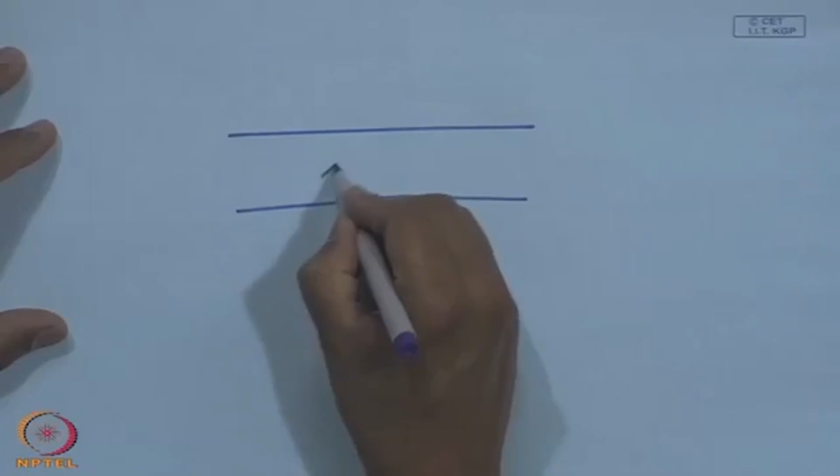Today we are going to discuss about detection of cracks in shafts. Predominantly, when cracks occur, materials and structures fail, but we need to monitor the cracks and the system so that they can be detected at an early stage, because cracks can occur in any system, be it a shaft or a plate, and for many reasons. Cracks are sometimes visible if they are on the surface, and if they are invisible, they are inside the body.

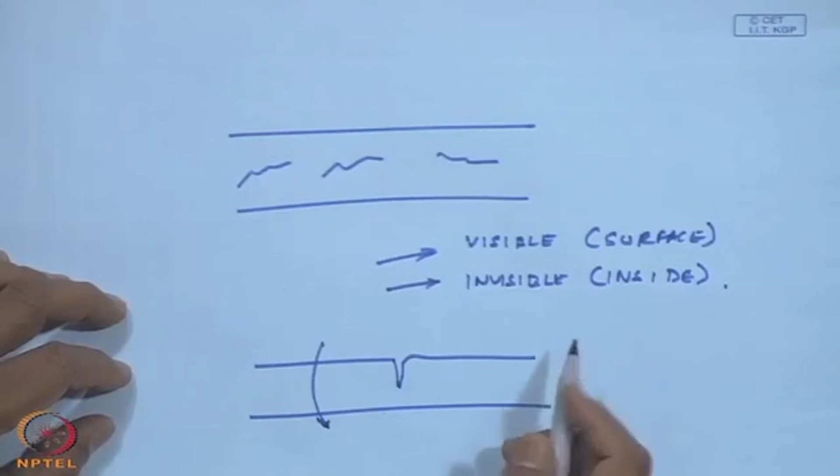Once cracks occur in a system, what happens? This is a shaft which is rotating. Obviously its strength is going to weaken and decrease, and eventually if this crack goes undetected, the component is going to fail, leading to catastrophic consequences. Imagine a case of a railway axle, where wheels go on these axles—if cracks occur and the system fails, there will be derailment, accidents, etc. So cracks have to be detected at an early stage.

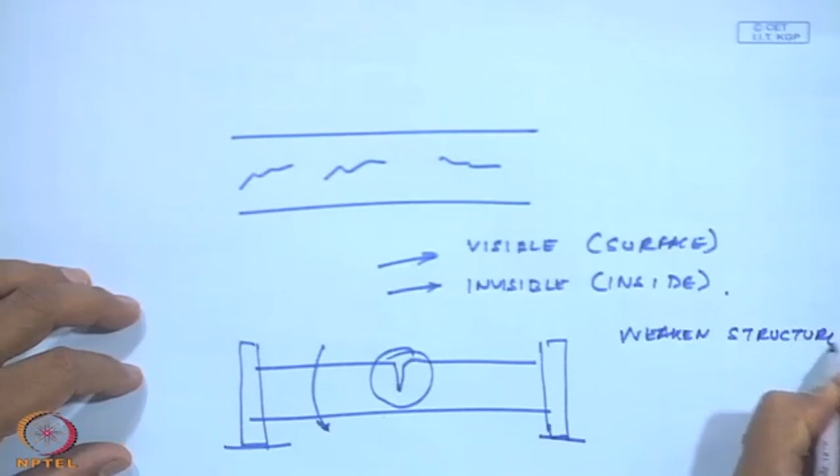If you notice here, this crack, a very generic crack, is going to weaken the structure. Its strength is going to decrease.

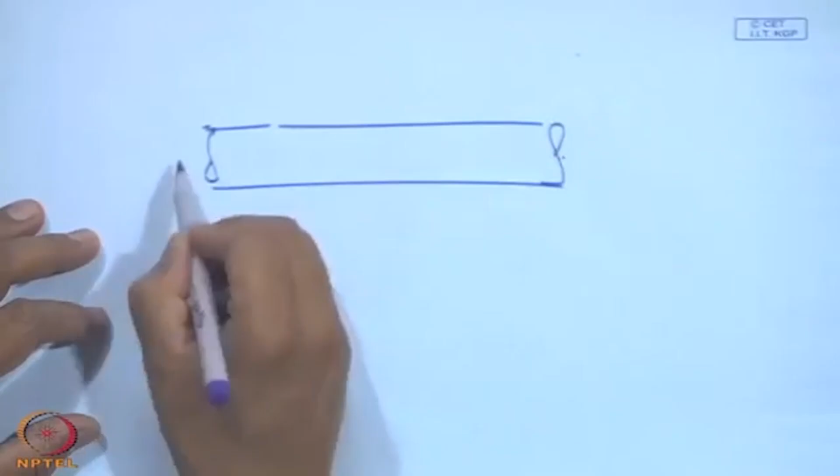Once the shafts are rotating, the systems rotating, this becomes a very complicated issue. Things are rotating, and if there are weights being carried on the shaft, because they are rotating, these cracks are subjected to varying loads. There will be fatigue loads on the crack, and a material subjected to fatigue loads is going to fail much more quickly compared to a static load.

Imagine this as a shaft, and it is rotating, and there is a small crack. Every time it rotates, this crack is going to open and close, and eventually because of fatigue loading it is going to fail much more quickly. This is something we should not let happen.

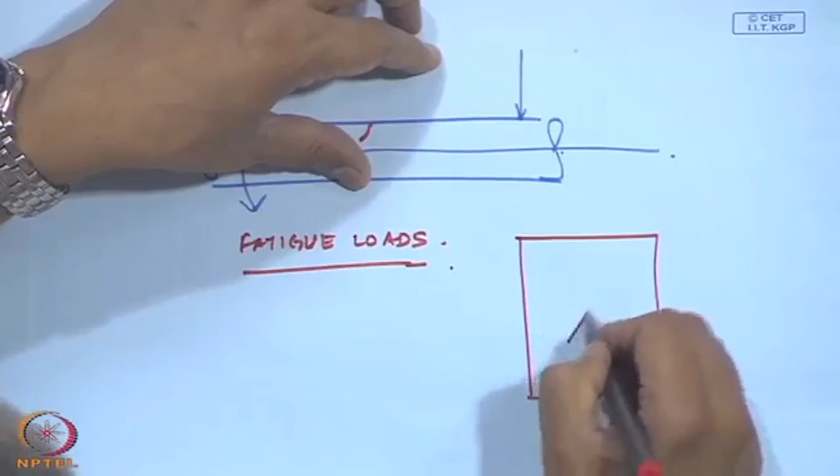This is one type of crack, and in this class we are going to focus on such cracks on shafts which are visible from the outside, and how we can detect them. But cracks do occur in structures, inside as well as outside. If it is inside the structure, it is very difficult to visually see it, so people do what is known as ultrasonic inspection, which we will study later on.

Ultrasonic inspection, or what is known as NDT type of tests.

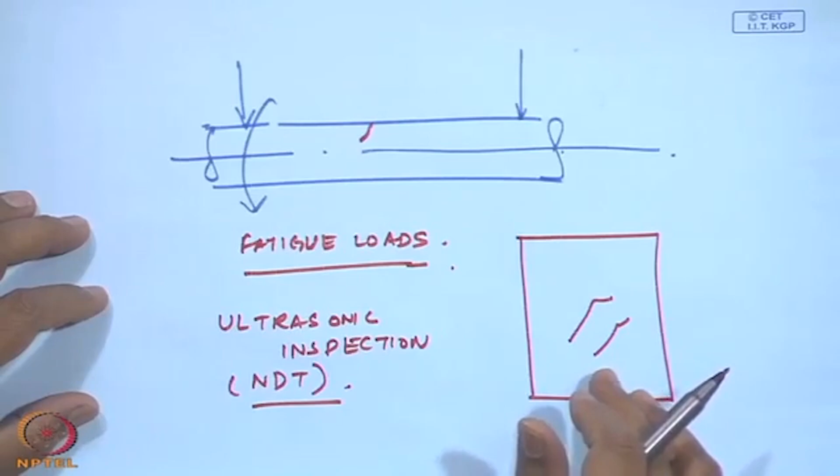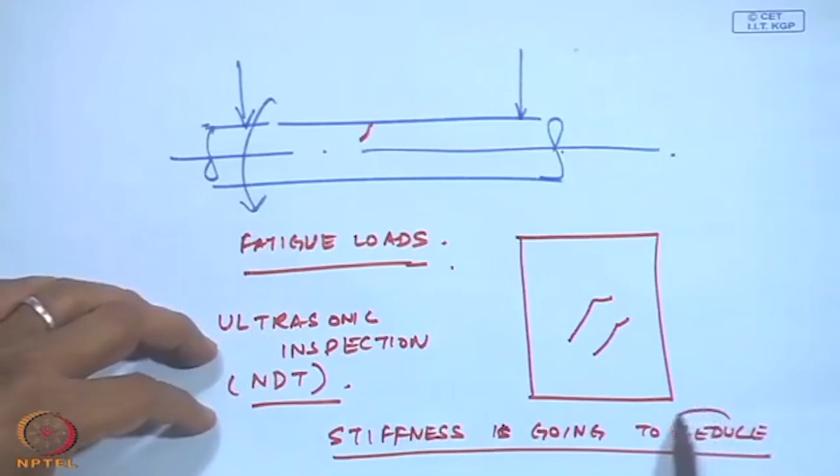One thing you will notice here: if a crack has occurred, the local area around the shaft is going to be not as stiff. Stiffness is going to reduce. Actually, reduce is a pretty strong word—I would say stiffness is going to change if a crack has occurred in a system.

You will recall the natural frequency of any system is root over k by m. So if there is a change in stiffness, there is obviously a change in natural frequency. With this, you will see there are methods of doing the eigenvalue analysis of a system, where we can find out the change in natural frequency and conclude that maybe a crack has occurred.

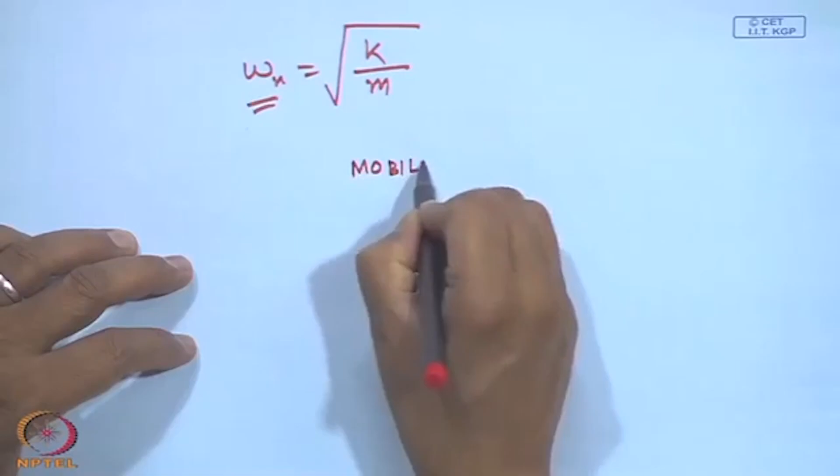The system's transfer function is also going to change. If you recall, the impedance of a system is defined by force by velocity. And then we have impedance, which is the inverse of mobility.

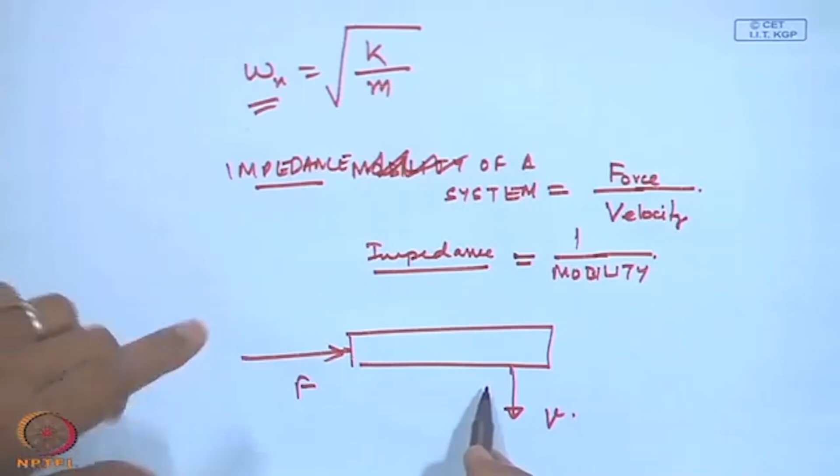By giving an excitation to the system, some force, and measuring some velocity, I can find out the system's impedance, which is force by velocity, the inverse of mobility. So by giving an excitation to a system and measuring its response, if a crack has occurred, this mobility is going to change. That is also another way of detecting whether a system has undergone a crack or not.

Before we go into the discussions on methods to find cracks, let me tell you the two types of cracks which can occur in a shaft. In this class, as I was telling you, we are going to focus only on shafts which have cracks; cracks occurring inside structures will be dealt with when we discuss ultrasonics. A load on a shaft could be because of bending loads. Shafts are supported on bearings—these are bearings.

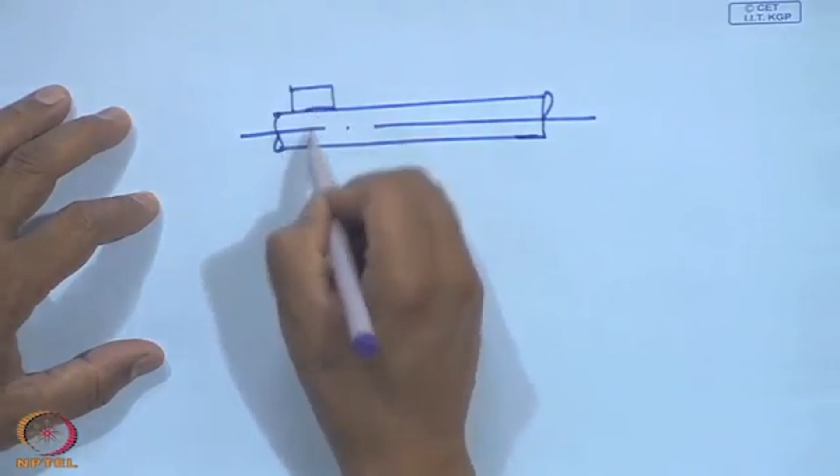There could be a crack, and there could be some bending load because of a weight. Then we are going to have this kind of crack, which is usually transverse, almost in this line. These are transverse cracks. And if I exaggerate it in the drawing...

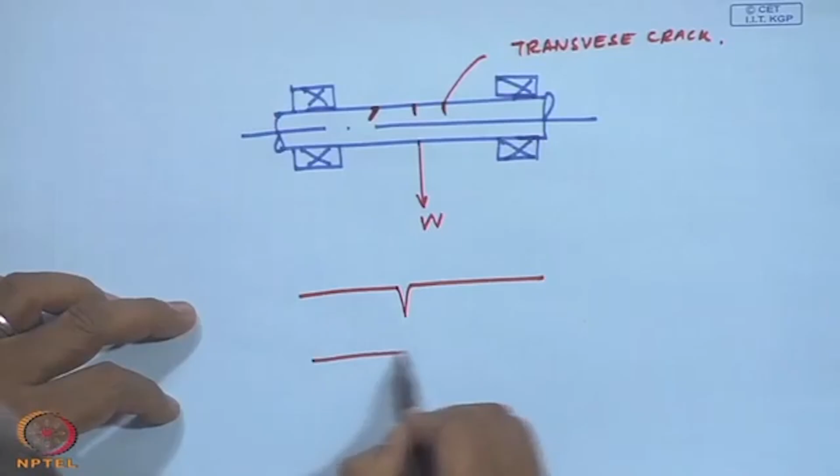So each time the shaft is rotating, once it comes to the bottom, because of the loads, the crack is going to open. Suppose there is a strong load here. It is going to open and close. Once it goes to the top, this crack is going to close, and again it comes down. It will open once it comes down.

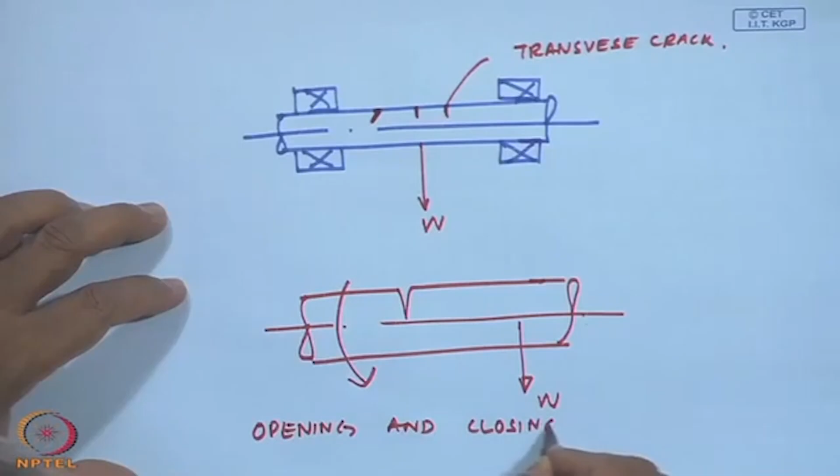It goes up, it will close. So this opening and closing of cracks occurs in a rotating shaft, and this is known as crack breathing.

Now, to our naked eyes, at times this will not be visible at all. Another parameter by which the cracks are defined is actually, if d is the diameter of the shaft and the crack depth is a, it is a non-dimensionalized parameter, a by d, crack depth to diameter.

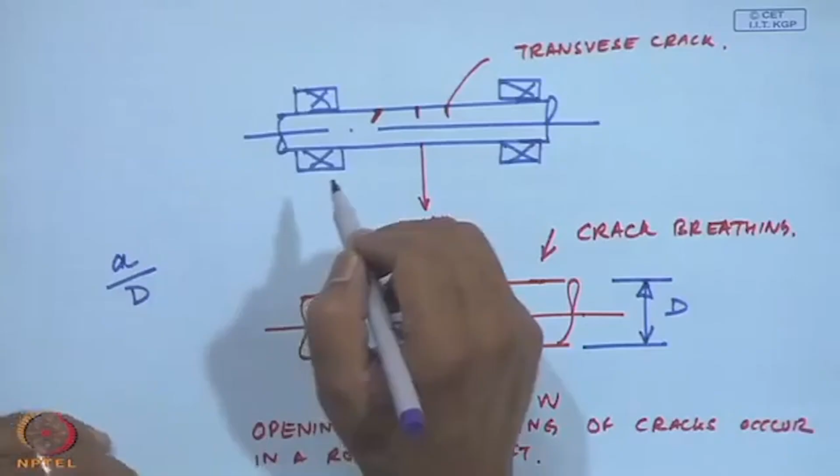Usually, of course, if a by d is 0.5, the crack is almost till the diameter. No system would go till even 0.5, because the structure would have become so weak it would have failed. Usually 0.1, about 10% of d, is the limit. Beyond that, we cannot have any structure sustain loads beyond a crack depth of 10% of the shaft diameter.

So we have to keep track of this parameter by which the crack is defined, and usually this is negligible, like a hairline. If you are talking about a crack on a shaft of about 12 mm diameter, even this dimension could be about 0.5 mm, a very thin hairline crack.

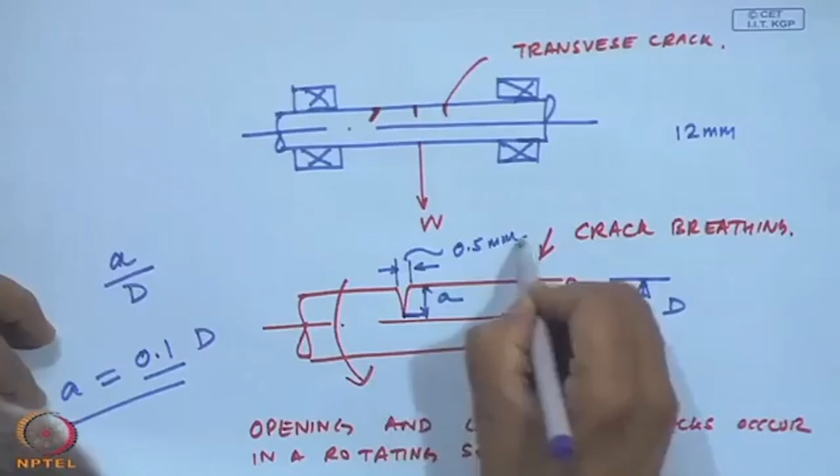In our laboratory, I will show you. We have done experiments wherein we use a hacksaw to cut a slot and make a crack also, and that's a massive crack, having a hacksaw cutting a slot on a shaft. But usually these cracks are hairline cracks.

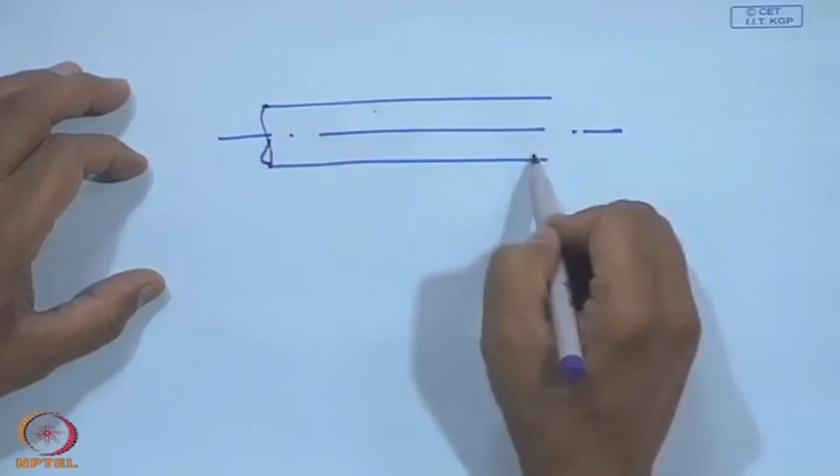This is a type of crack known as the transverse crack, because of the flexural loading on the shaft. Another important thing happens: as you know, shafts usually carry torsional loads. They transmit power, so they carry a lot of torque. And usually, because of the torque, the maximum shear stress occurs along the 45-degree lines.

If you are transmitting torque, usually the cracks are at this 45-degree axis, and these are the slant cracks. If you see cracks oriented on a shaft along these lines, you can know these cracks are because of the torsional loading on the shaft and not because of the flexural loading.

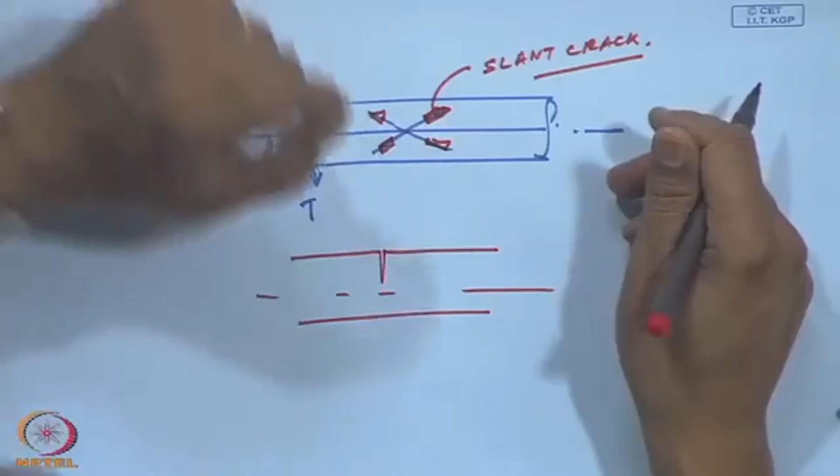Flexural loading, as I just told you, will be transverse in nature. So essentially in shafts, either a transverse crack occurs, a slant crack occurs, or a combination of both occurs because of the type of loading on the shaft, which is usually flexural loading because of bending forces, or torsional loading because of the torsional moment the shaft carries. So what are the symptoms or signs by which we can detect whether a crack has occurred through vibration monitoring?

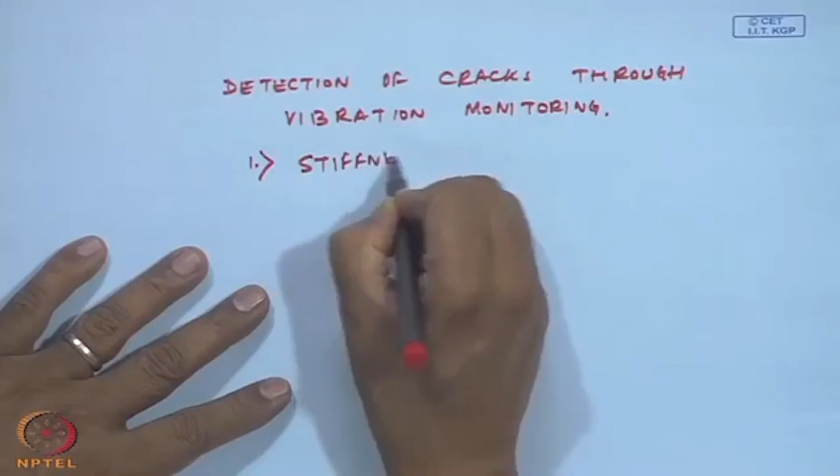Number one is the stiffness will change, so we can monitor the eigenvalues or the natural frequency. Number two, the mobility, inverse of the impedance, will change, so we have to do this through impedance measurements.

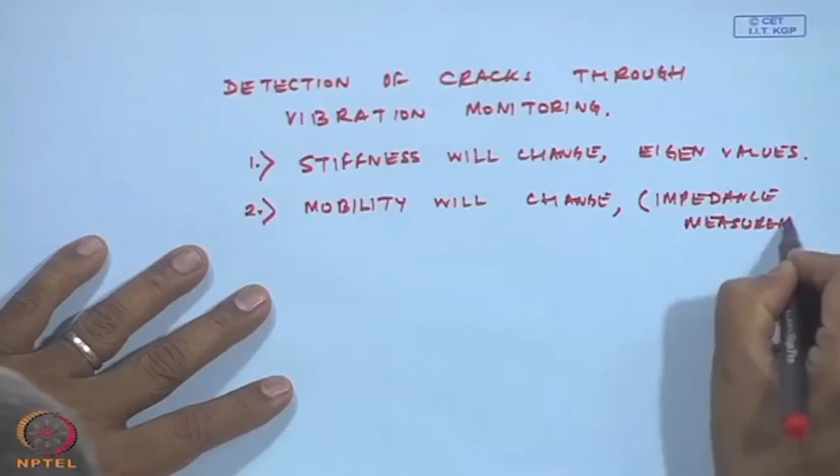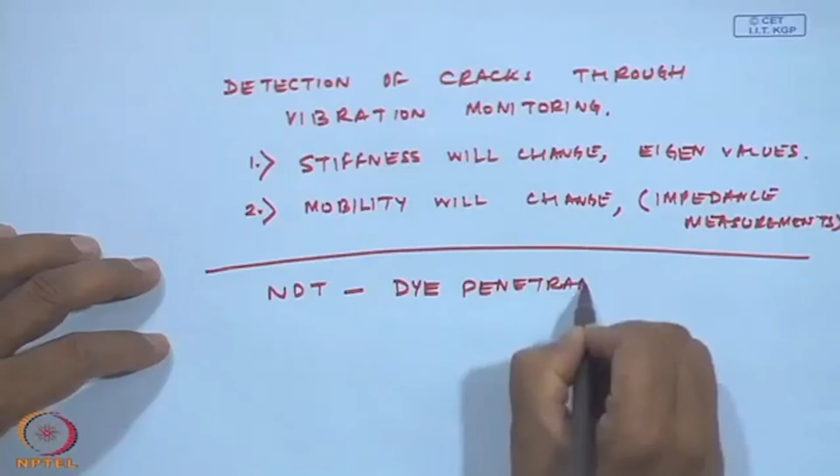Of course, once we are discussing vibration monitoring, there are techniques beyond vibration monitoring by which cracks are detected, and these are usually for stationary cracks on structures. One is through the NDT techniques of dye penetrant test, particularly to find out hairline cracks on castings.

Particularly, I will just give an example. So, for example, we cast an engine cylinder block. This is some view section of a cylinder block.

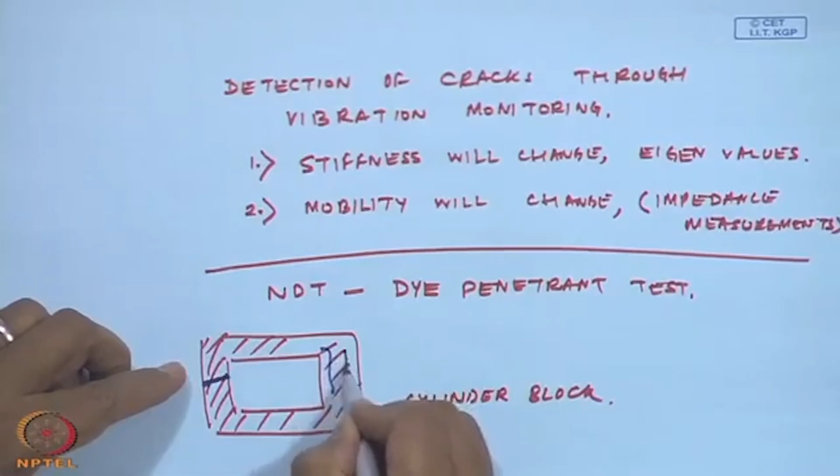A crack has occurred, a very thin hairline crack. Now, if you see a cylinder block, there are many things which happen. There are a lot of water passages which are made in the casting itself, so that the cooling water goes all around the cylinder block.

Now, they are under pressure. So, if there is a crack, what is going to happen? This water is going to ooze out. So, how do you detect such kind of cracks? That is why they do what is known as a dye penetrant test.

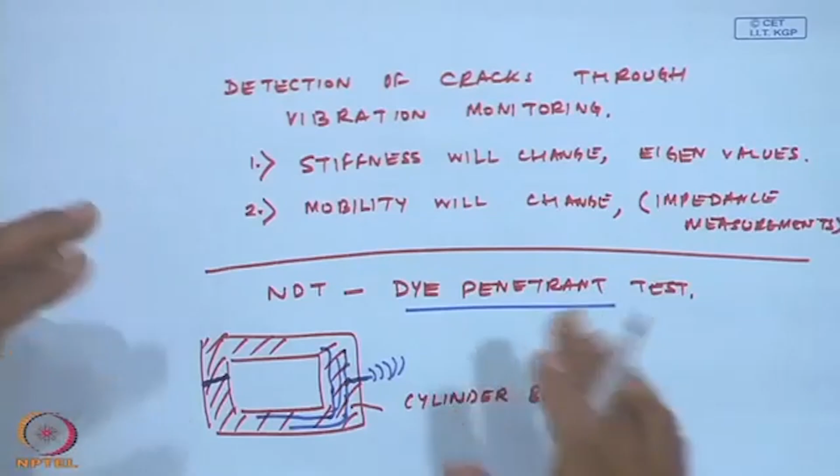After the castings are done, they smear it with a dye and then rub it off. If the crack is there, after you have smeared the surface with the dye, this dye will make a mark, ooze out, and clearly show that a crack has occurred just by looking at the dye. This dye could be not visible to the naked eye; under a fluorescent lamp the dye will glow, and then you can clearly see that a crack has occurred.

That is one way, which we will discuss later on in the ultrasonic and NDT section. And another crack detection technique, which they do for shafts which are rotating, particularly imagine in...

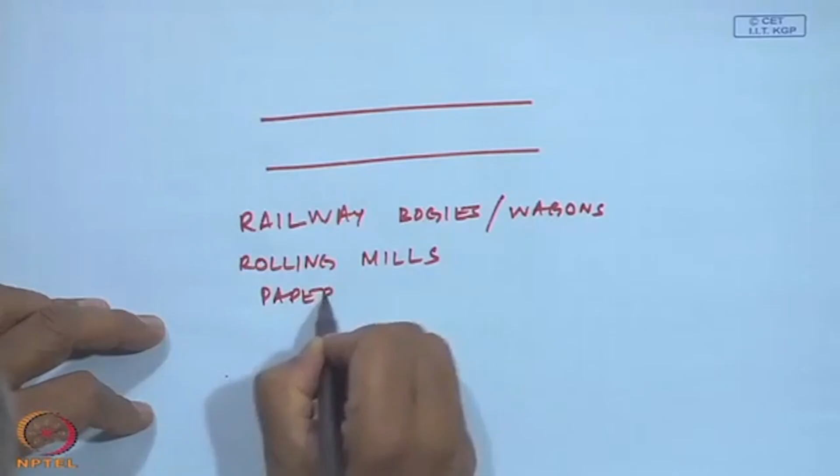railway bogies or wagons, rolling mills, paper mills, cement plants.

Here we have an axle of the train which is rotating. If the crack is inside, it will have the consequence that the structure is going to weaken, it will fail.

Rolling mills, a lot of rolls are there which run continuously. If a roll breaks, the steel plant, the cold rolling mill or the hot rolling mill, cannot produce.

Paper mills, there are about 100 to 200 rolling rolls. If the rolls crack, the paper mill is going to get shut down.

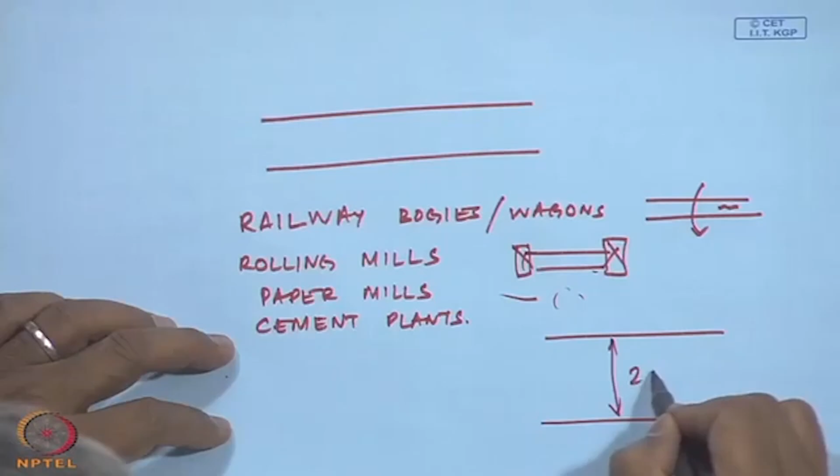Cement mill, the rotary kiln, a big shell about 2-3 meters in diameter, which rotates. If there is a crack, eventually the system is going to weaken and fail.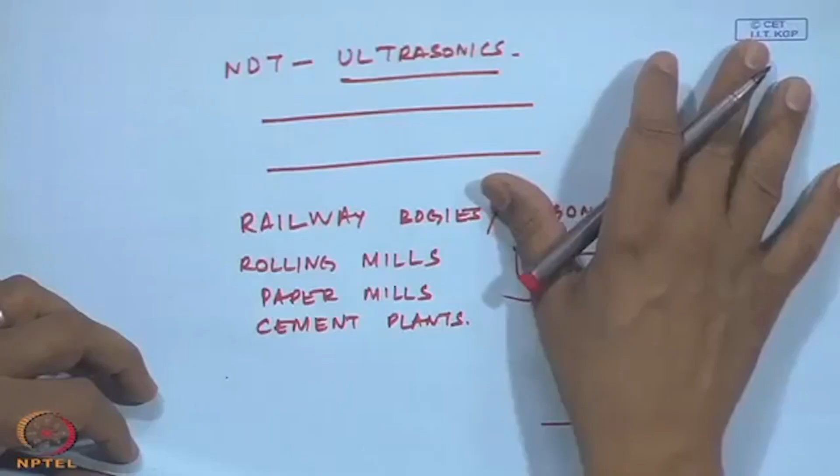So, these are actually tested by an NDT technique of ultrasonics. We will discuss about the dye penetrant and the ultrasonics in a later class, but in this class I wanted to focus on the dynamics of cracks in a shaft and how we monitor it.

So, we know that we can measure the mechanical impedance of such a system, we can measure the natural frequencies of a system, because if cracks occur, the stiffness is going to change, and so the natural frequency is going to change. Let us see how we can do that.

Shaft is totally cracked, and to simulate cracks, what you do is tighten these 4 bolts, loosen maybe the top 2 or any 2 or any one, so that at one end of the crack, maybe if I draw it here...

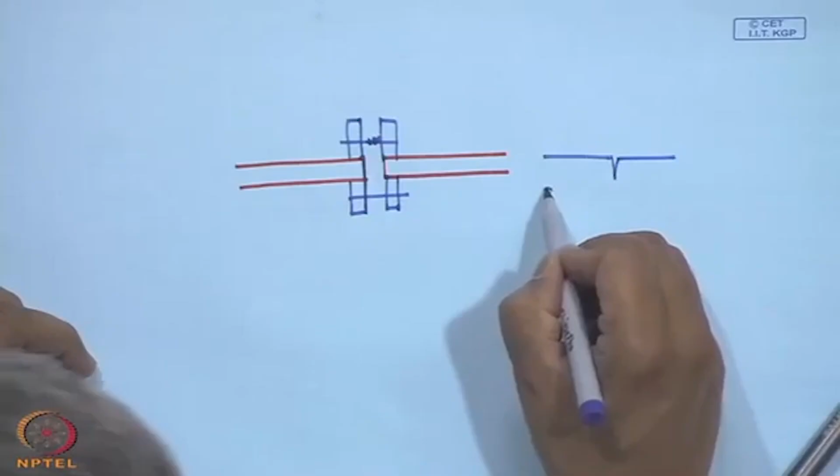If you see here, we have put 2 flanges. They are actually 2 crack shafts already, and then if you bring them together and put bolts, we join them, and then if you loosen this and tighten this, cracks maybe, this shaft maybe could be like this. So, to simulate a crack, we do this in the laboratory.

It's a heavy weight which is rotating along the sides of these cracks, so that this is responsible for giving that load, bending load which is coming down, and which will be responsible for opening and closing of the crack and creating this breathing mode.

So, we have got the vibration measurements from this system, and I will show it to you later on. Then we will have another setup which we do to find out the mechanical impedance. Like I told you, the techniques for detecting shaft cracks are mechanical impedance and then the eigenvalue analysis.

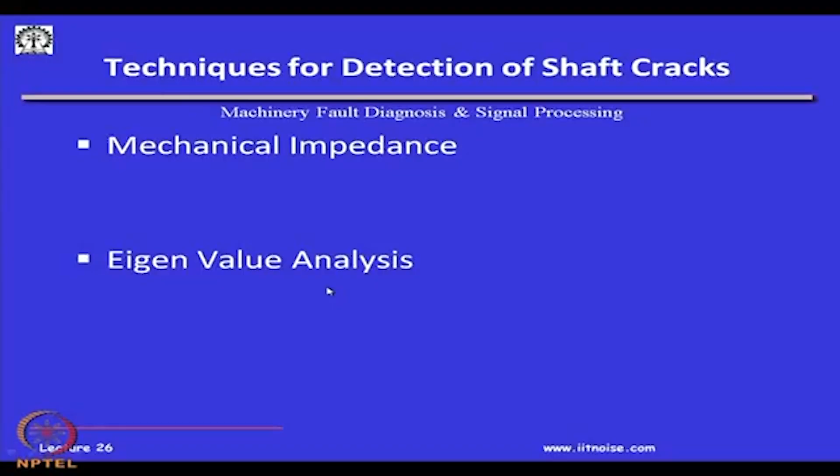To do that, we have this system where the shaft has a heavy disc, and we introduced a crack very close to the disc. This disc is responsible for opening and closing the shaft, and we try to measure the impedance of the system at one of the bearing locations.

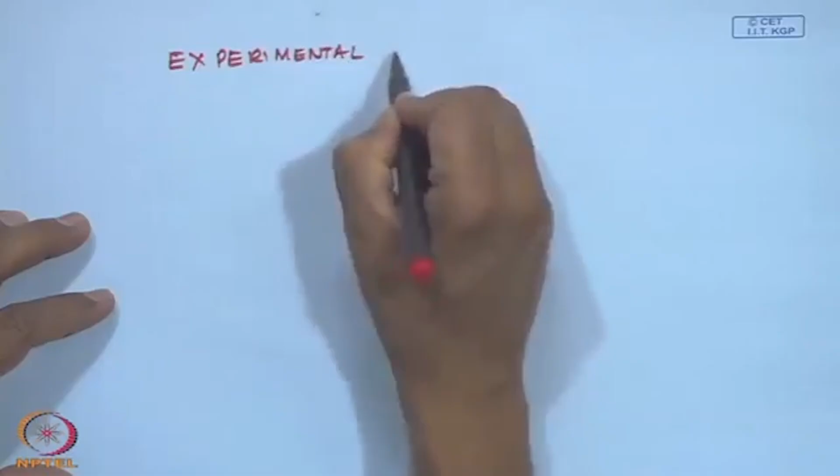Compressor, turbine, etc. So what we have to do is go through modal testing, through experimental modal analysis. Well, what is experimental modal analysis? Basically, we find out the transfer function of a system: the response to the excitation.

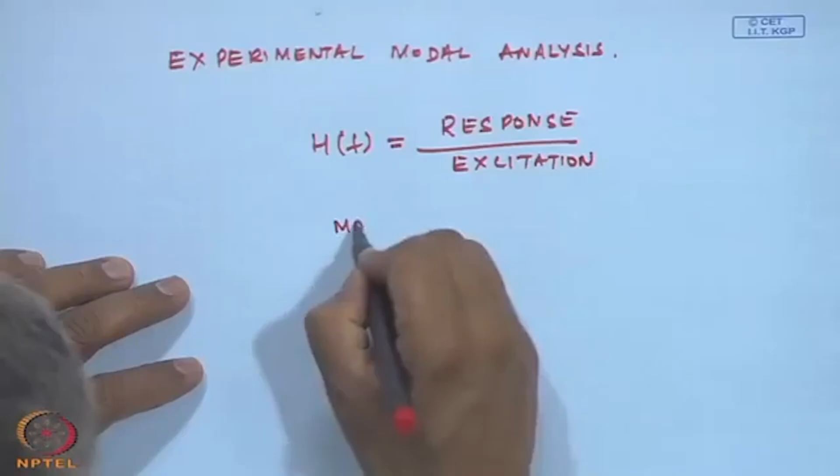In our case, mobility is nothing but velocity by force, and impedance is force by velocity. So for an unknown system where we have to do crack monitoring, all we have to do is give a certain known force at the frequency of operation. Suppose a gas turbine rotates predominantly at maybe 24,000 RPM to maybe 30,000 RPM.

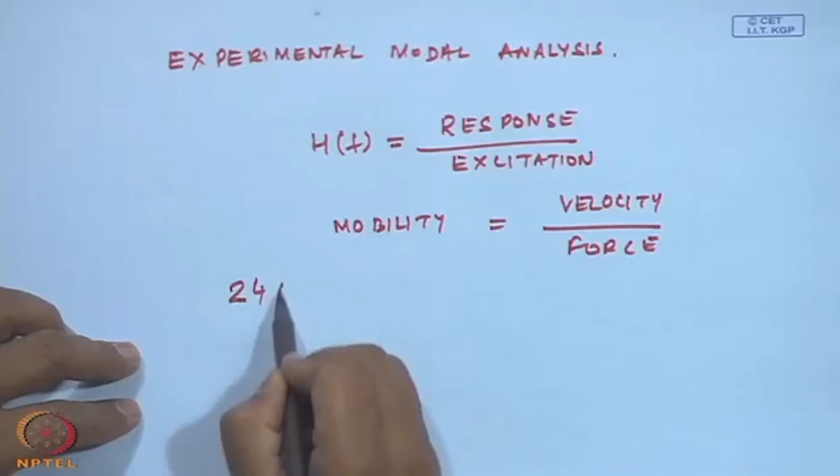This will correspond to 24,000 by 60, about 400 to 500 hertz. So from a range of 400 to 500 hertz, or a few of its multiples, you excite this system through a force.

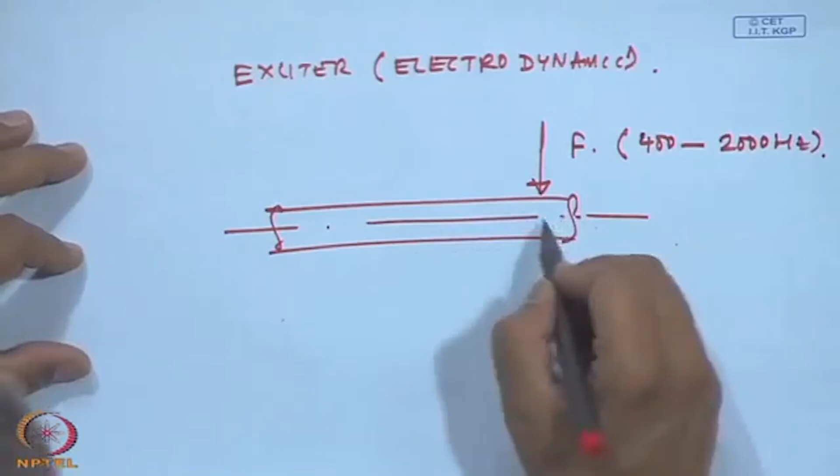How do you excite the system? Through an exciter. Usually, because it is a large gas turbine, we can use heavy electrodynamic exciters. I give a known force F from the frequency maybe 400 to 2000 hertz, and at the same time at the bearing locations, since turbines are supported with many bearings, we measure the response.

At any of the bearing locations, you can measure the force, and then with the suitable transducer you can mount an accelerometer, etc., measure the velocity, measure the force, and plot a mobility curve V by F as a function of frequency.

Now all you have to do is continuously keep on monitoring V and F. By continuously, I mean you need not give the force excitation every time, but momentarily, every day once, you measure V by F.

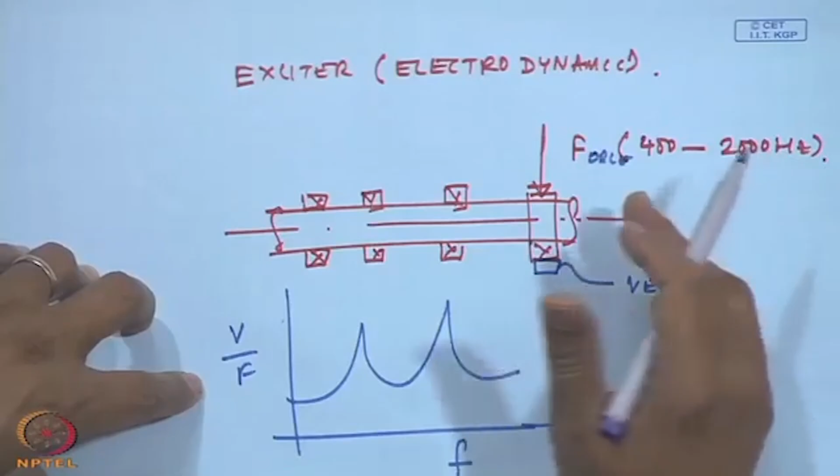Suddenly you will see this V by F, if we do the ratio. So this is my original, which I call m naught. And then you will have m n, which is V n by F n.

So you will plot m n by m naught as a function of frequency, and you will see that with a crack occurring, suddenly it should shoot up.

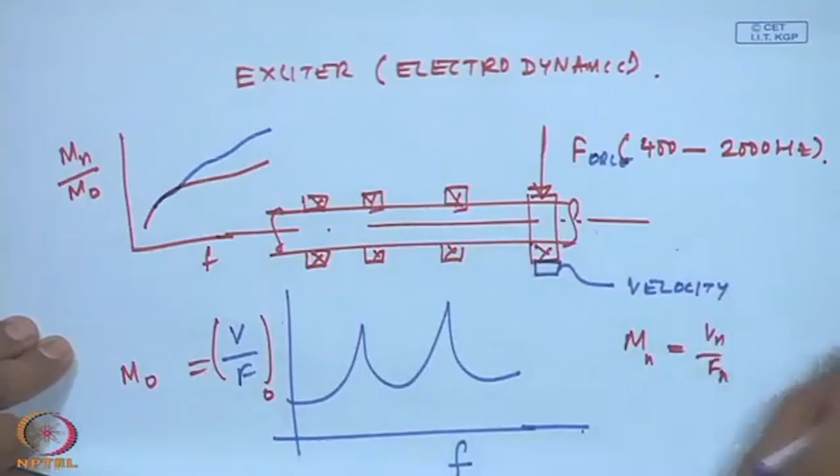Going back to the slide, I am plotting m n to m naught as a function of crack depth, but at a particular frequency I can monitor them. These frequencies are the operating speeds, and I will see that with a particular crack depth it is increasing. If the crack depth has increased, this value is going to increase.

So at a particular frequency I can decide on the frequencies. Frequencies usually will be the operating frequencies, and this is out of our research which we did about 10 years ago.

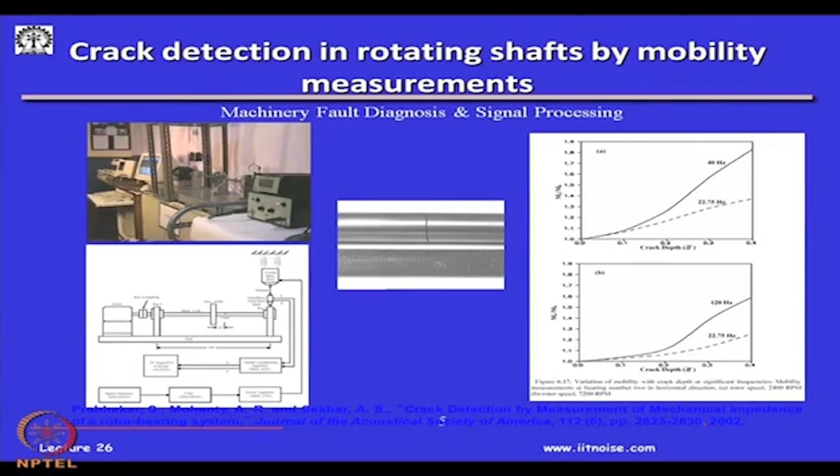Just measuring the mechanical mobility of a system to monitor cracks occurring in a system. You can get a reference to this paper at my website. This came out in JASA in year 2002.

Volume 112, number 6, pages 2825 to 2830. The details about this technique are given in that paper of ours, wherein just by monitoring the mobility of a system, we can tell whether a crack has occurred in a system or not.

Now, in a nutshell, to monitor the occurrence of cracks in large systems, you have to measure the mobility of such a system periodically, and if the mobility value increases, you will get an indication that the crack has developed or is growing.

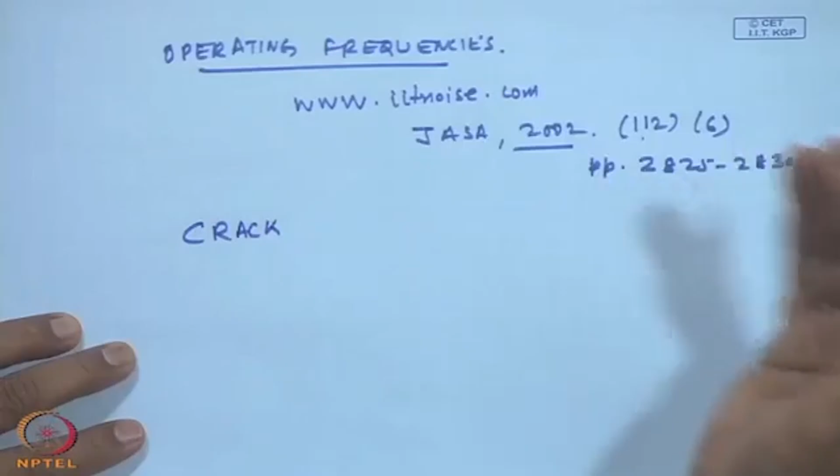And once it happens, a crack also takes time to grow, and that is what is saving us. If cracks occur suddenly without reason and don't grow but just fail, it would be disastrous. So crack takes time to grow, and this helps us in the prognostics.

You have the famous Paris equation for the crack growth rate, which depends on the material property, the crack dimensions, etc. So it takes time to grow, and eventually the crack will grow to such an extent that the material would have become weak and it would fail.

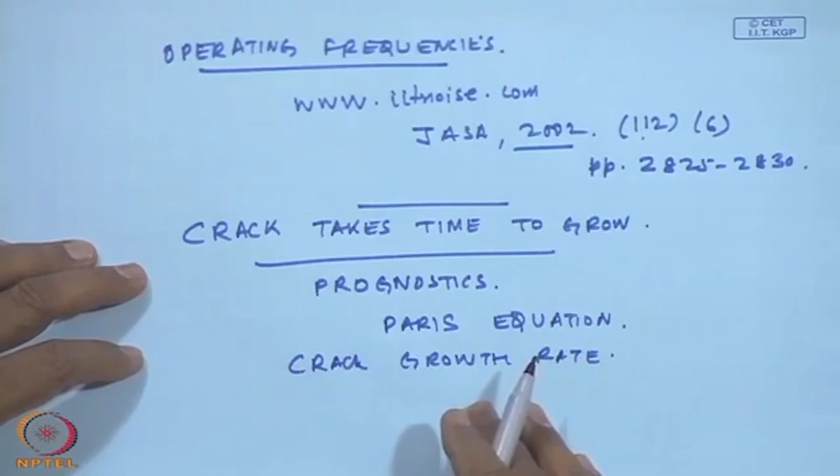But through a mobility measurement, initially when the crack has occurred and grown to a few A's, say 0.5, where A is defined as the crack depth by D, we will see that the mobility value suddenly shoots up. So mobility is sensitive to crack beyond just monitoring the velocity of vibration. By velocity alone it would be very difficult to monitor whether the crack has occurred, but by doing the mobility measurements, we can surely say the crack has occurred.

This is what actually happens. Here's another, better drawing of what I meant by this crack occurring at a distance. The crack can have a maximum distance of L at a location X from one of the bearings. So there is a rotor here, the shaft of diameter D, and A is the crack depth as defined.

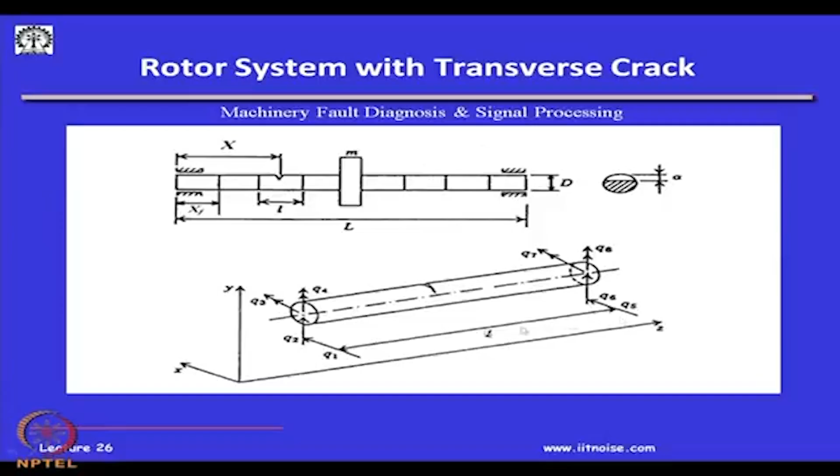Because of these, there will be forces coming in the bearings, the stiffnesses are going to change, displacements are going to happen, and so on. And when the cracked shaft rotates, this is how the stiffness varies. This is the breathing model for the transverse crack.

In a complete rotation, this is how the shaft undergoes stiffness changes, flexibility changes, because the cracks are opening, closing, opening, closing. At any location, the flexibility which I measure at the bearing locations is going to change. The stiffness is going to vary.

Now let us see what happens in the breathing behavior for a slant crack. Here I have subjected them to a torsional loading, and the cracks have occurred in the 45-degree axis. So the crack will once open and once close. This is also the breathing behavior of a crack, but it is slant.

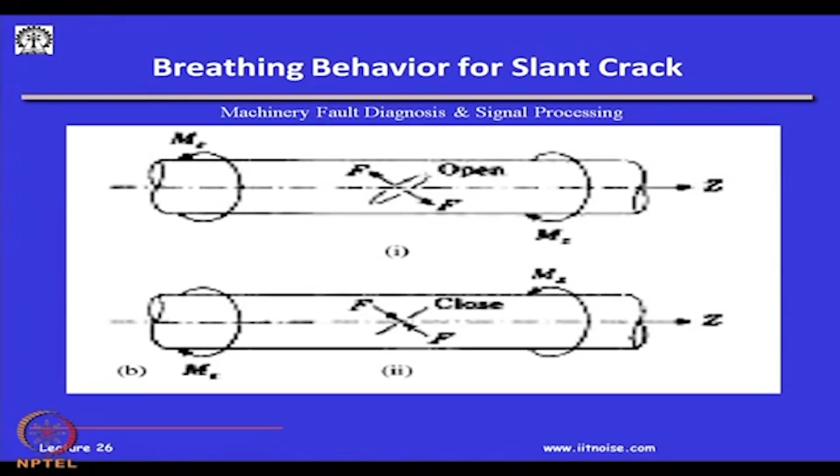But then the question would be, how do I distinguish whether a crack has occurred because of a torsional load or because of a bending load? Because once you do the diagnostics, you will see eventually a crack has occurred in the 45-degree axis. But if you are measuring the vibrations, you would not know whether it is a breathing mode because of a slant crack or a transverse crack. I need to know the cause of the crack.

Was it a transverse load which created the crack? Was it a torsional load? Or another fundamental question you will be wondering is, okay, a designer would have taken care of the loads, so why is the crack occurring? To answer that question, there are many ways.

So these materials are used to make the case of a shaft. For example, let me take the case of a pulley. By pulley, I mean a pulley of a conveyor system. It is not the conventional pulley which we use for power transmission in our small motors or pumps, but I am talking about conveyors where these are actually supported on bearings.

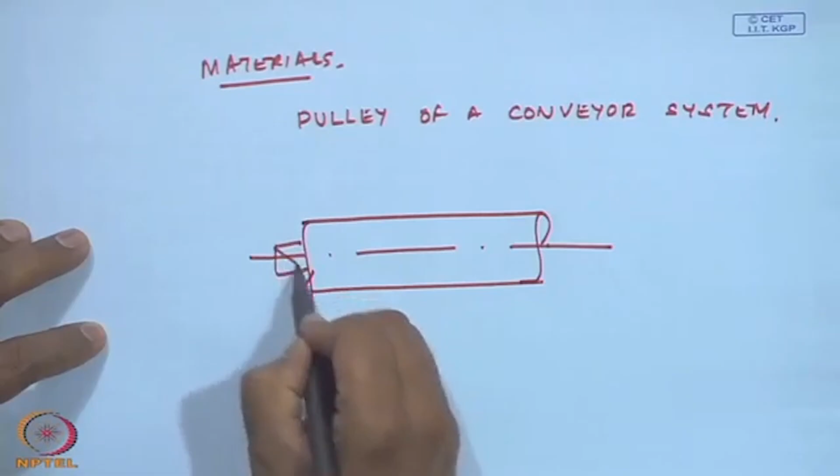Just to give a feel of the dimensions, this length could be about 2 meters, and this diameter could be about 0.5 meter. This thickness of this, it is a hollow drum, and then there are some end plates here onto which we put a shaft. This thickness is about 20 mm.

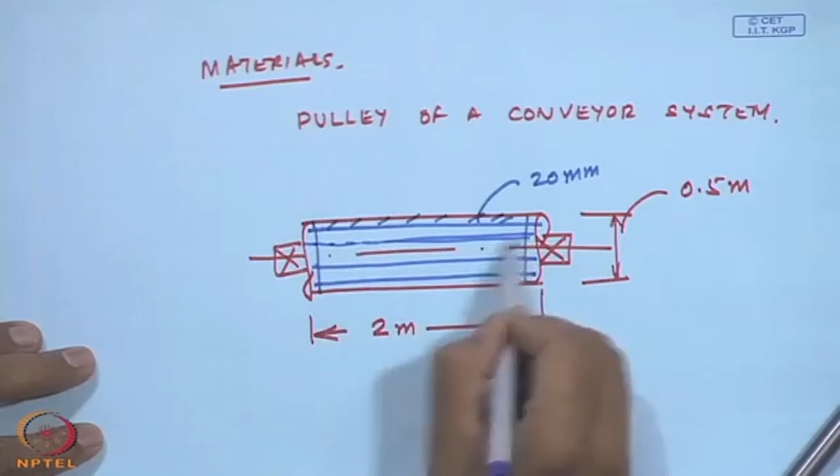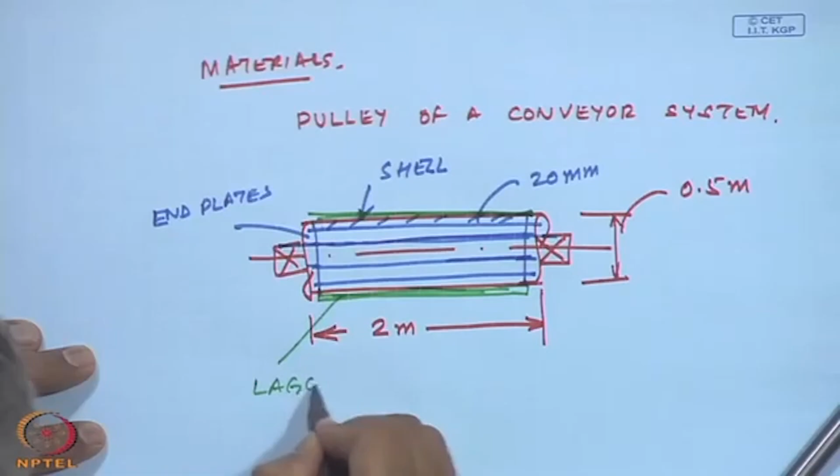Now the shaft is a solid shaft onto which we have the end plates. This is the shell. Usually on this shell they put a rubber material to protect the shell. This is known as the lagging, a rubber material.

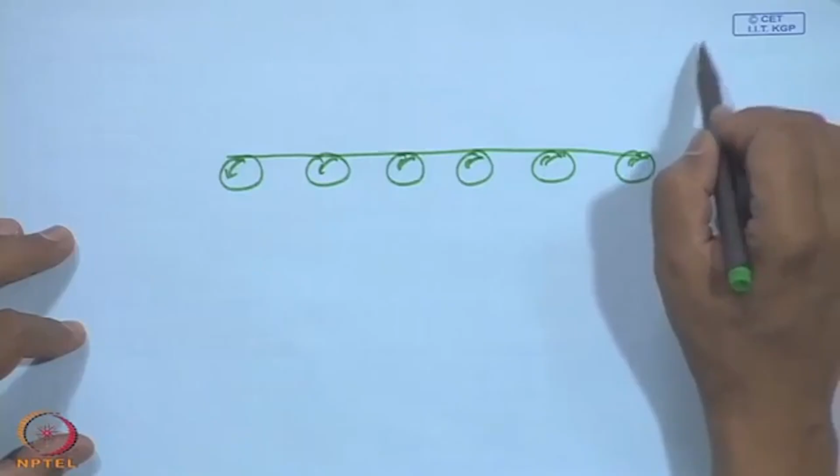And in a conveyor there could be a series of such pulleys, and there will be this conveyor belt going on. This could be a big ship here, carrying maybe coal, and then there is a crane here at the port, which will scoop and then drop it at a bin, and then this gets transferred to the place where there will be railway wagons carrying the coal out. This could be as long as maybe 1 kilometer, and each of these pulleys are maybe 5 meters apart, and they could be carrying coal at the rate of maybe 5,000 tons an hour.

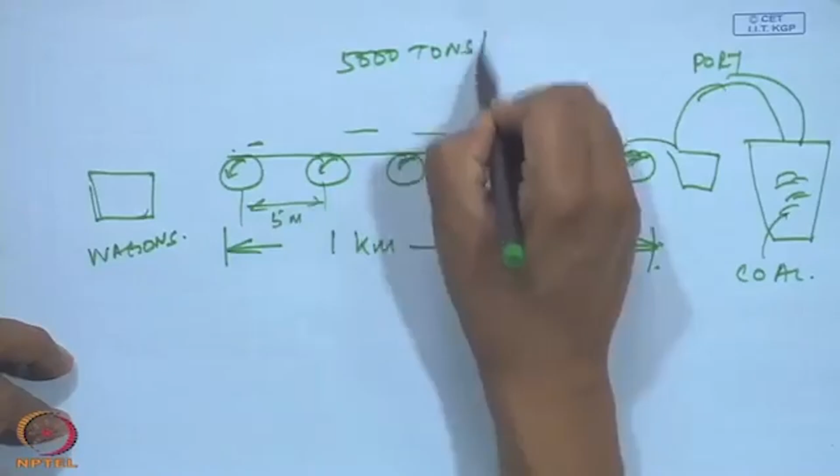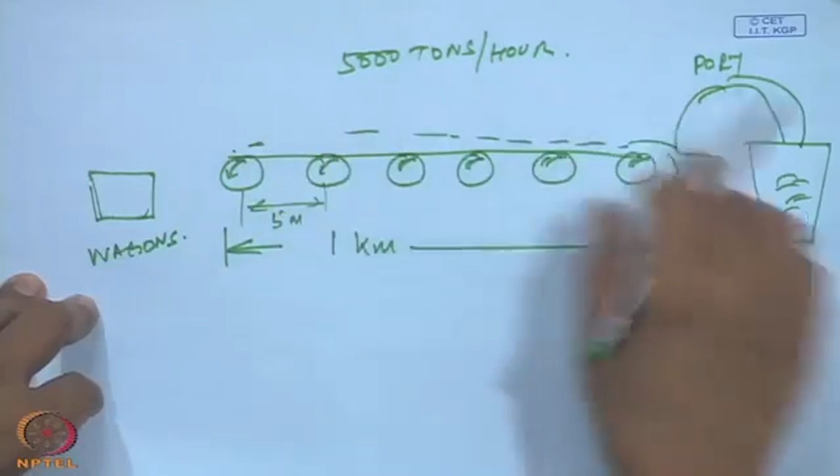This is the typical scenario if you go to any port, either the loading circuit or the unloading circuit. In our country, in all the ports, we do unloading or loading of the iron ore. We send out the good iron ore and get the good coals from outside, because we don't have good coals in our country, or we get the coals in and the iron ore goes out in the conveyor systems. In such a system, if a crack occurs in a pulley of the conveyor, it is not going to work. Now the question is, a designer would have done a good design to ensure that the conveyor system does not fail, but there have been instances.

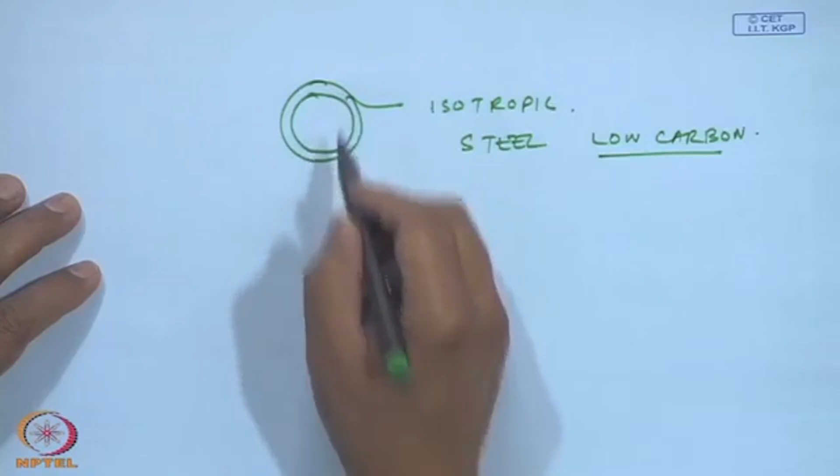I have seen some of the pulleys. The material of the pulley is supposed to be isotropic, steel of a particular grade, usually low carbon steel with particular properties. These pulleys are made out of plates, and these plates are produced by hot rolling.

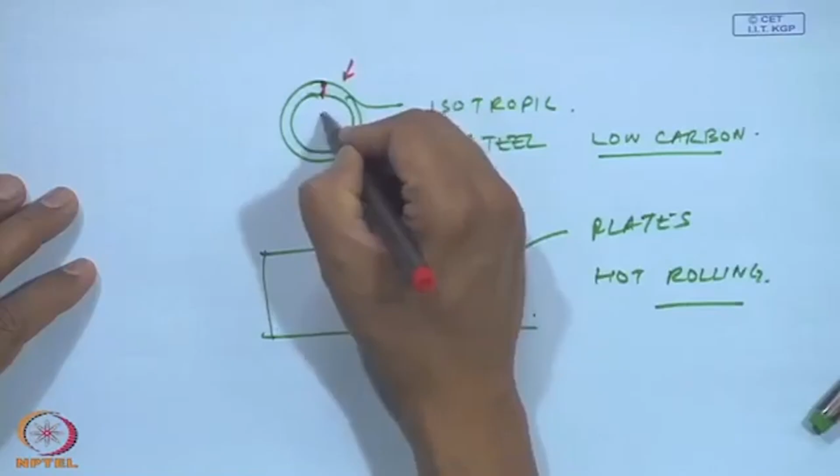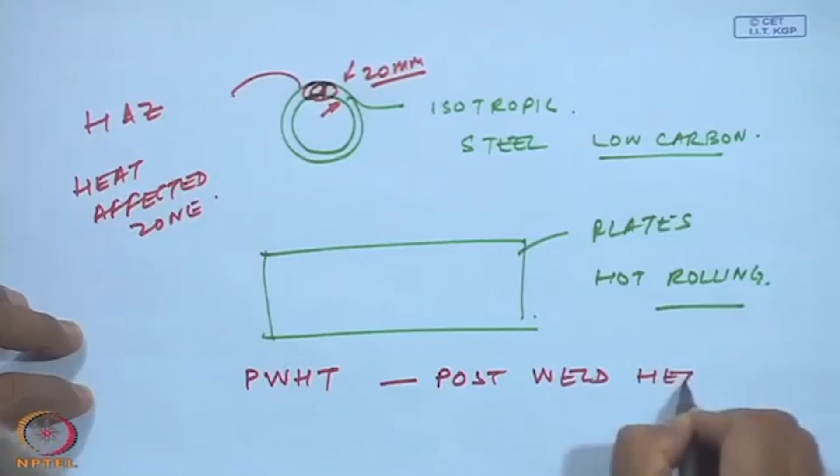And then they are welded at one location. Imagine welding a 20 mm plate. There will be a lot of heat concentration at one zone around the weld, and that is known as the HAZ, heat affected zone. So usually after welding you have to do a good amount of post weld heat treatment.

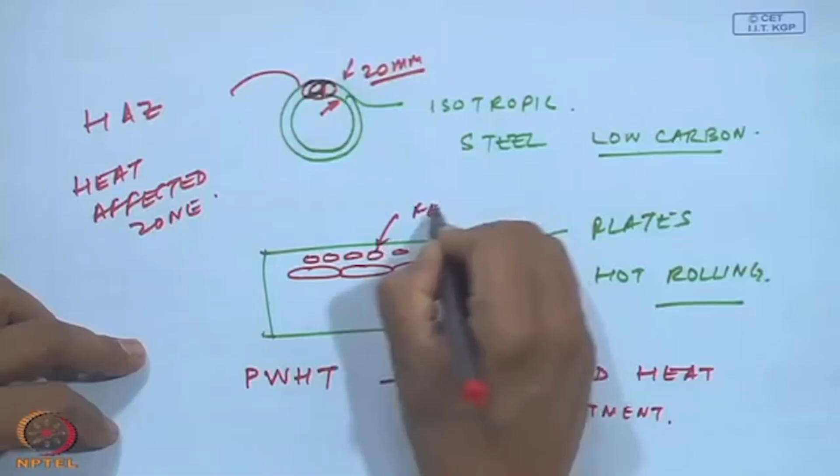Otherwise, if you look at the microstructure of such plates around this area, you will see that the grain sizes are not uniform, and there could be banding in it. This could be ferrites, and this could be pearlites, and this banding gives rise to alternate hard and soft areas around the weld.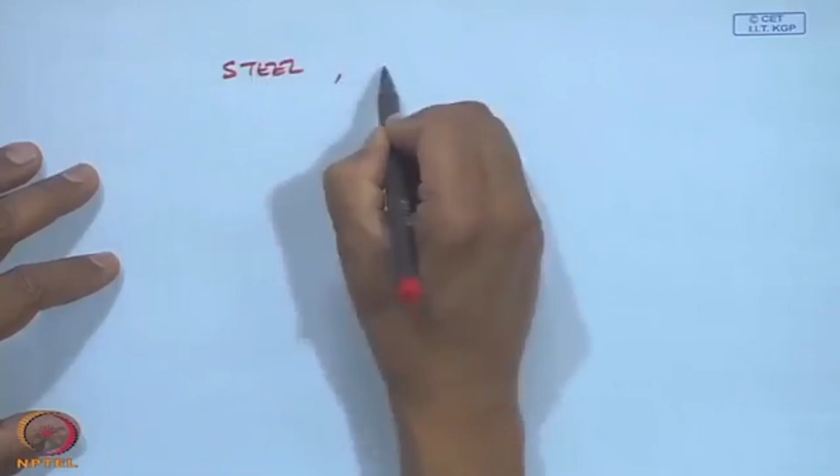Usually for steel, if a plate is 20 mm thick, immediately after welding you have to hold that material which has been fused at that weld temperature for about 1 hour.

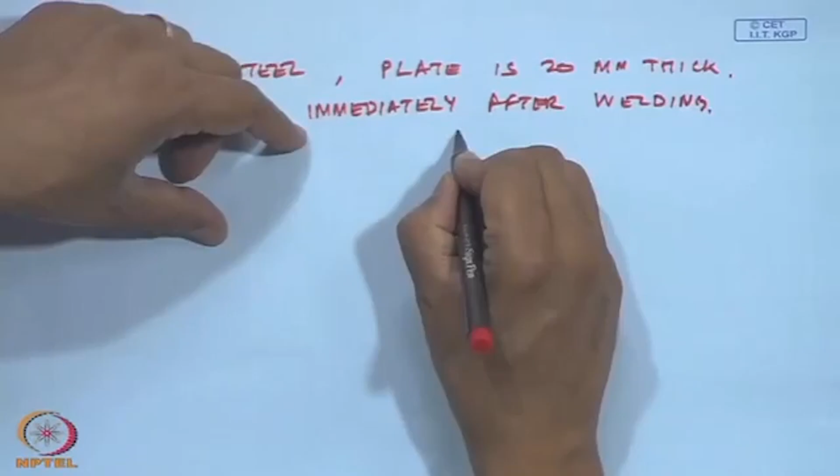That means you should not cool it suddenly. If you quench it in a cold bath, there will be a brittle surface on the top, it will harden, and then it will crack. So we have to always hold it.

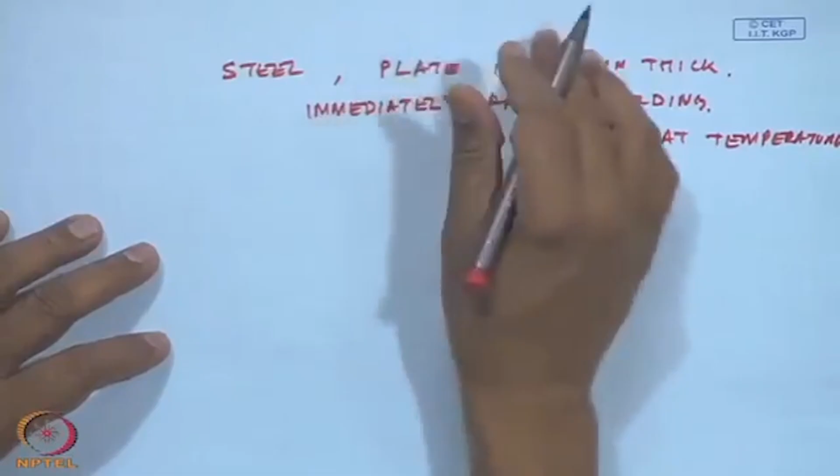Many times the fabricators at site do not do this, because to hold it at the temperature you have to insulate it - usually an asbestos cloth is put over the weld. And even before you weld it, you cannot suddenly bring the material from room temperature and start to heat it. It is slowly heated up to bring it to temperature, and then the welding is done, held for 1 hour at that temperature if it is 20 mm thick, and then slowly cooled, usually by covering the weld with an asbestos cloth. If you do these things, you can avoid cracks in systems and shafts.

Another reason cracks occur is because of casting defects - blowholes in castings which go undetected, poor casting, and these blowholes etc. can be checked by ultrasonic testing.

Now, this is another thing. In the last few slides we showed you about mobility. Here, we will show you about the change in eigenfrequencies, or natural frequencies, once the crack occurs. This is again the normalized eigenfrequency, the first 3 eigenfrequencies. With crack depth increasing, at some particular frequencies they become very sensitive to the change in eigenfrequencies. So eigenfrequencies and mobility are true indicators that cracking has occurred.

If you just monitor one eigenfrequency, you may not be able to see it clearly; you have to normalize with respect to the original natural frequency to see how much variation occurs, and similarly with respect to the original mobility. Just doing an absolute mobility or eigenvalue measurement will not tell you what change has occurred because of cracking. But if you take the ratios, this clearly shows that such changes do occur.

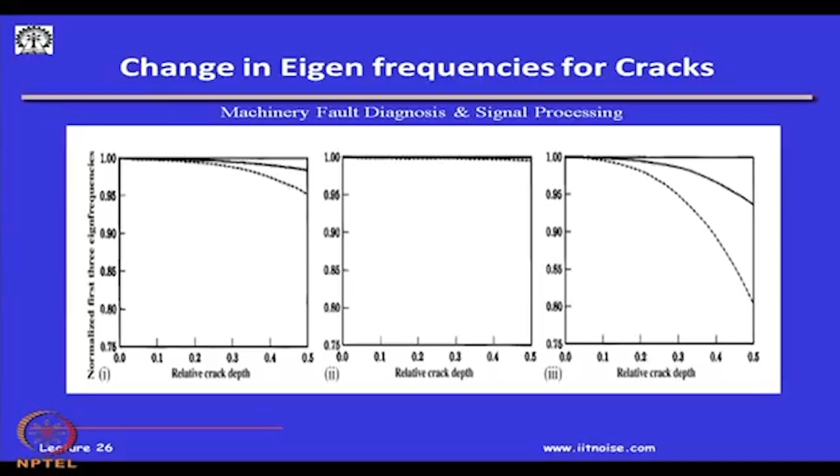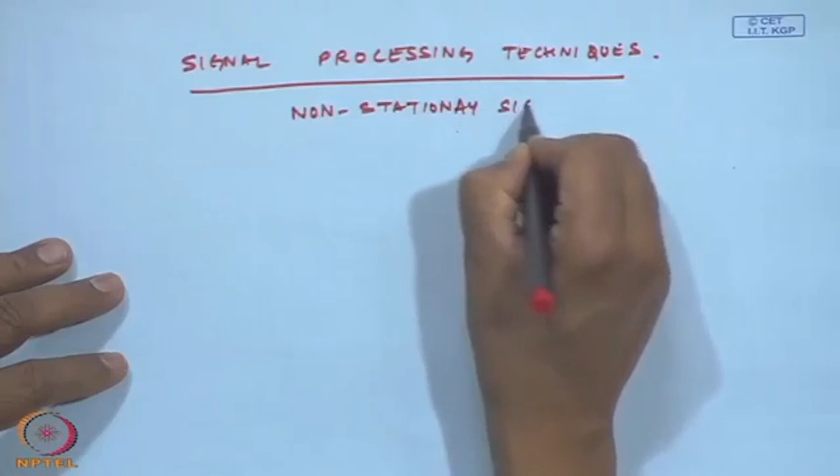Now, a lot of signal processing techniques have been used to detect cracks also. In this class we are not going to discuss the details of non-stationary signals, I will just tell you briefly. Particularly, when you start up a shafting system, which is known as a coast up, or coast down, and if you do what is known as a wavelet analysis...

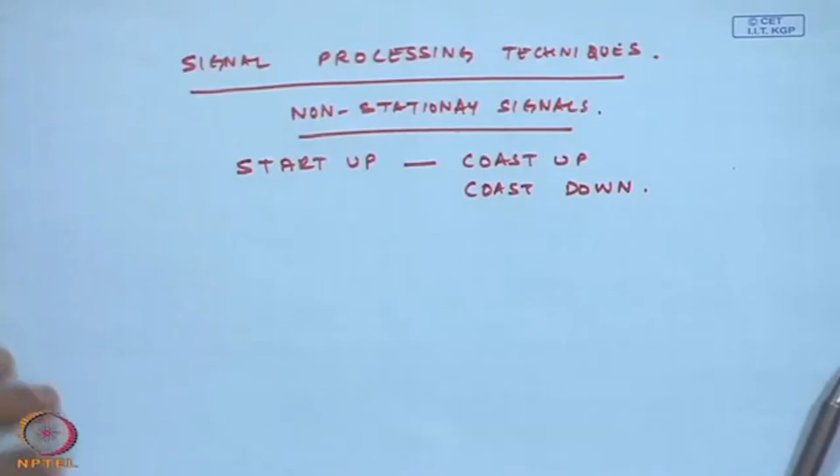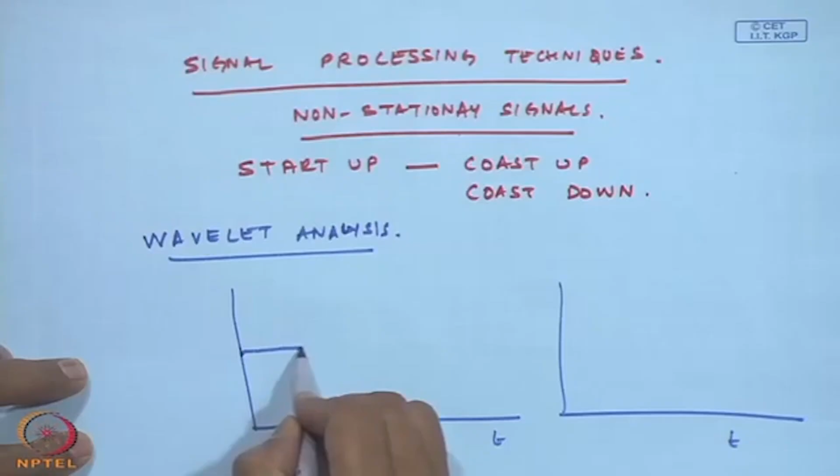...and if I have a shaft at some velocity, the presence of subharmonic lobes indicates cracks.

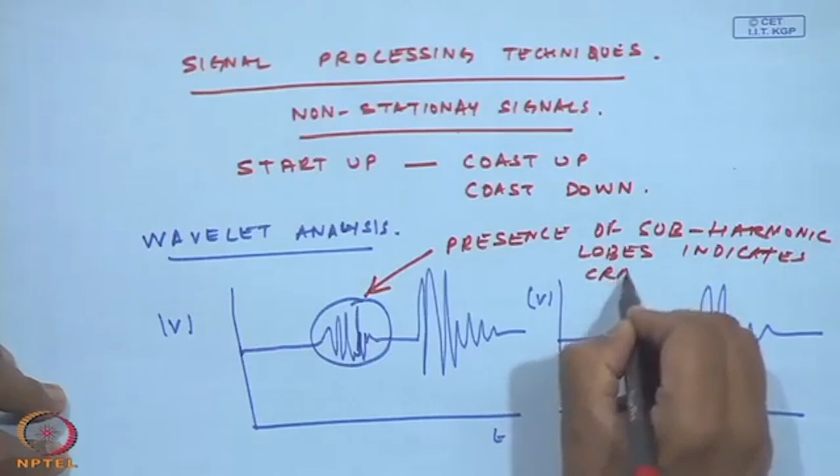This can only be done when we coast up or coast down a system. By coasting up, I mean changing the speed, ramping up the speed from 0 to some value. When you are ramping up, because the signals are not at constant speed, this is a non-stationary signal, and we can see this kind of lobes appear once we do a wavelet analysis. Though in this course we are not going to discuss wavelet analysis in detail.

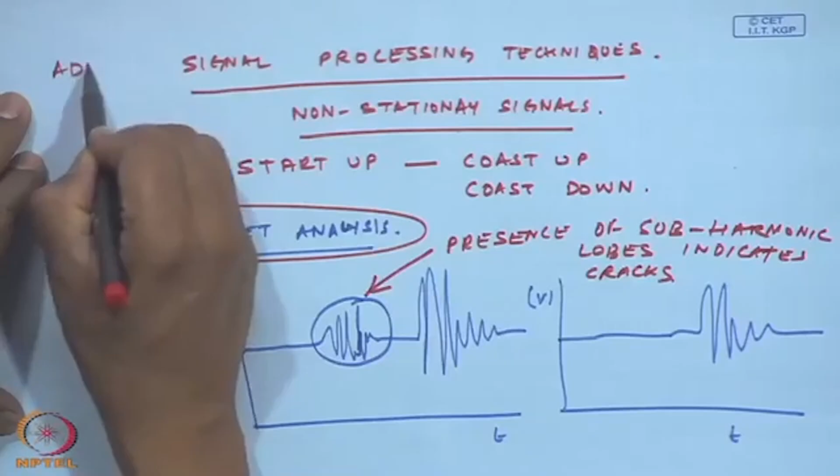So through advanced signal processing techniques, we can also detect cracks. Earlier, people were never monitoring cracks through such vibration monitoring. They only did an NDT test, either through ultrasonics or dye penetrant, to locate cracks. But nowadays, with the improvement and understanding of the science, and with these algorithms, people can find out the occurrence of such cracks in such systems.

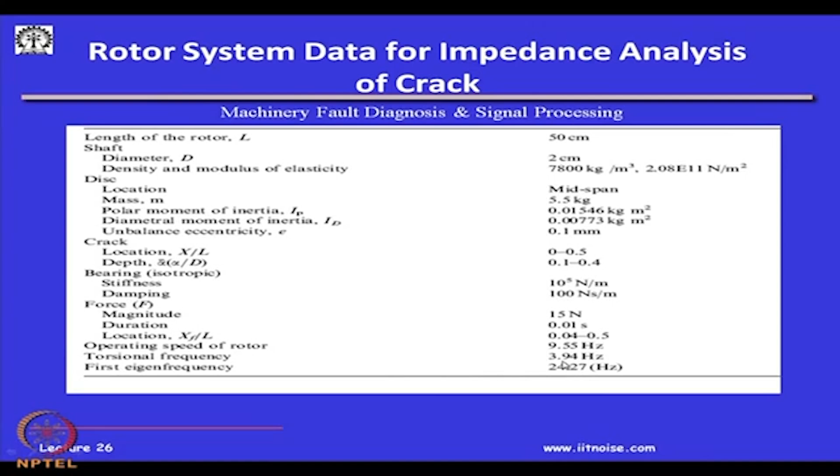Now, to do the impedance analysis of cracks in the laboratory, these are some of the data we used. The length of the shaft was about 50 centimeters, diameter was 2 centimeters, and the density etc. was set. The first eigenvalue was 24.27 hertz, and the rotor was rotating at 9.55 hertz. With this kind of simulation, we did the analysis, and this last table gives an indication of how the transverse crack compares with the slant crack.

So, when there is breathing, opening and closing of the crack, cracks breathe with a frequency equal to the rotation of the shaft speed in the transverse crack, and in the case of a slant crack, they breathe with a frequency equal to the torsional frequency.

Here, in the transverse crack, the eigenvalues reduce significantly compared to the slant crack. In the steady state response, the FFT shows the characteristic 1x, 2x, 3x, but in the slant crack they show the subharmonic and superharmonic of the rotational speed. By sub I mean less than the rotational speed, super means more than the rotational speed.

In transient analysis, we can use wavelets to detect transverse cracks, like I told you. In the case of the response to an impulse force, the normalized mechanical impedance is highly sensitive to crack depth in the transverse shaft, and in the case of the slant crack, it is relatively less sensitive.